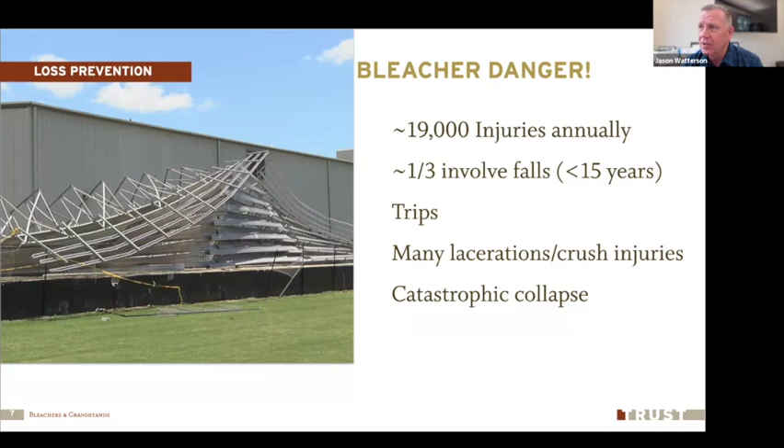One of the major injuries that happen are falls, and falls, as we know, are injuries that can be significant, that can be life-threatening. And then there are those black swan events that are out there when you have a collapse of a scaffold or a grandstand structure, bleachers, that could cause death and serious injuries to a lot of people. And if you look back through history, there have been some really ugly things that have happened at events like this. And you just imagine the mayhem that would happen if we had a collapse, and what would happen if people were injured. It's pretty frightening thing, and so that's why we want to do things right.

Well, I've been using the terms bleachers and grandstands through this, and there's a standard that we go by, and so I went with that standard for the definition. Here is the definition of what bleachers are: tiered seating supported on a dedicated structural system and two or more rows high. Okay, that is a bleacher. Well, when you read in the standard what it says for grandstands, it's the exact same definition. So these two words are really interchangeable.

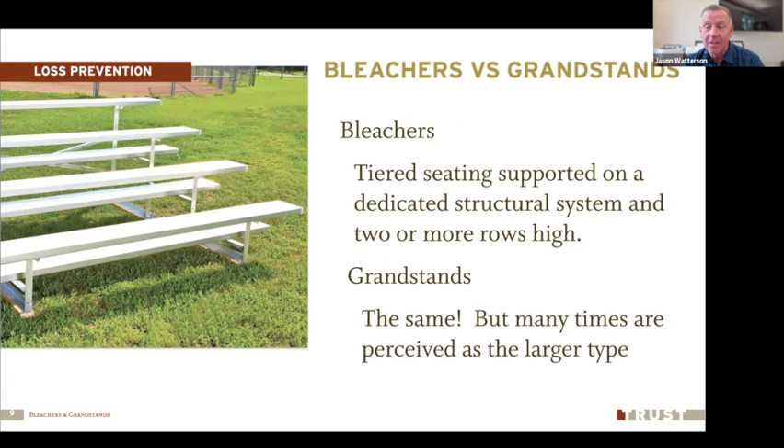But generally, when I think of these things, I think of bleachers as being like in the picture. These are the things that we go out to the baseball diamond or soccer fields. Bleachers are like that, and as they get bigger, we may call those grandstands. But for purposes of this presentation and the standards that we'll talk about, they're the same thing.

All right. These bleachers can either be portable or fixed. Some are designed to be moved from place to place. Some are fixed and they haven't moved in some of our facilities out there. They haven't moved for 100 years. We have some significantly older grandstands and bleachers around. We have some that are brand new, and they all have potential to cause injury. They can be indoor or outdoor. The standards vary a little bit based on that.

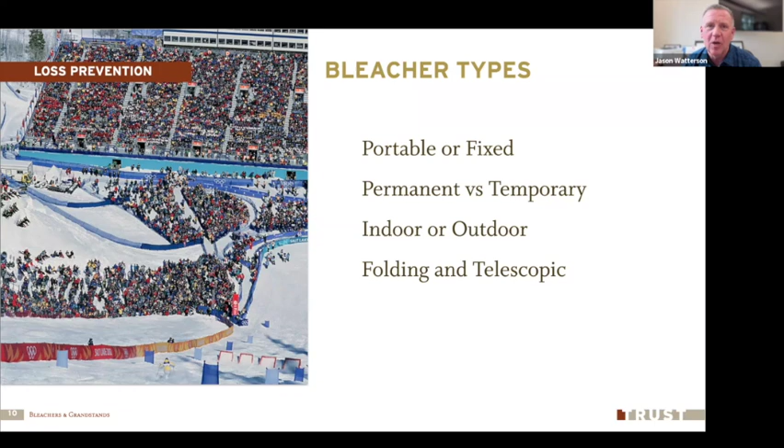They could be folding or telescopic. You think back to your school days, and you may have had telescopic or folding bleachers that would come out from the wall in the gymnasium to provide that seating, but we didn't have to have those up all the time. And there are specific requirements for that as well. In Utah, we have even created some massive temporary grandstands or bleachers for events. I worked for the Salt Lake Organizing Committee for the 2002 Winter Olympic Games, and we created some massive grandstands, particularly for the outdoor venues at our ski resorts. Well, these were temporary.

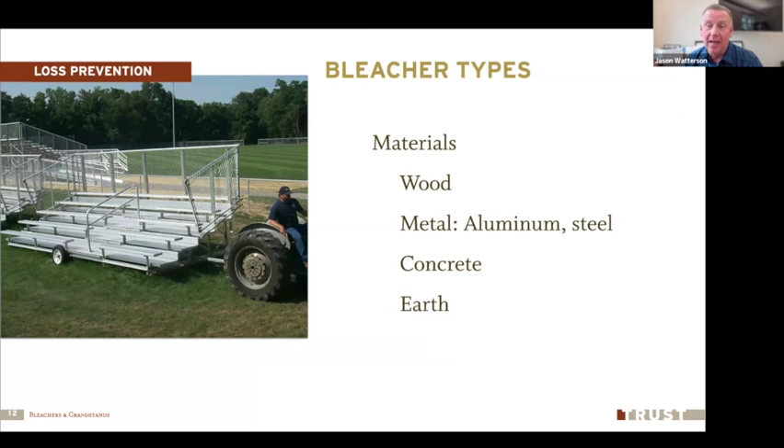Bleachers can be made out of a lot of different materials: wood, metal, aluminum, steel. Sometimes they are poured in place concrete. I've seen some bleachers that are a little more like an amphitheater, but they were just carved out of the side of a mountain, and they all fit into the same definition of bleachers.

I already alluded to this and said it right out. We have standards about how bleachers are supposed to be constructed, how they're supposed to be maintained, and all of the ins and outs around those. Here are the standards that we talk about.

This is the major one that really applies, and that's the ICC, the International Code Council 300, and it's the 2023 standard. So there's a fairly recent update to that. It is an ANSI standard. These are standards that are a consensus among people in the industry. In many cases, consensus standards are not a standard that has legal enforcement power.

But in the event that we have a problem, these will be the standards that we will be judged against in a court of law, in whatever negotiations after a claim has occurred. That ANSI standard or ICC standard could be really critical, so it's important that we know what it is.

With this particular standard, it has been incorporated into the International Building Code. So if you're dealing with bleachers and grandstands, it's part of the building code, and we're going to have to legally comply with this as well.

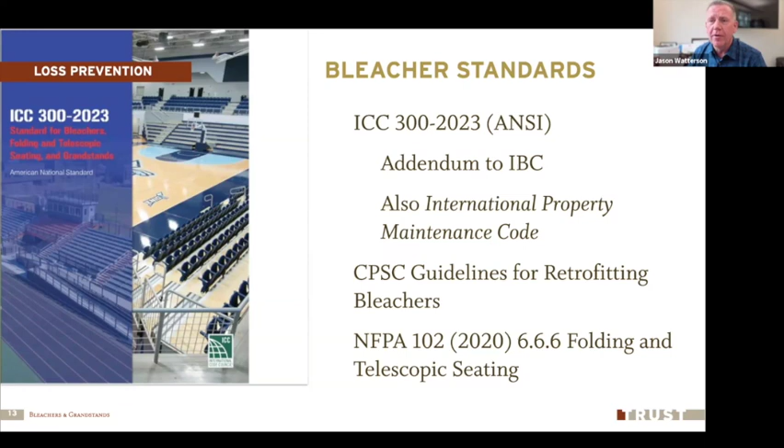We're not going to hit that one specifically much. We're going to talk about the ICC standard mostly. I wanted to hit just a couple of those now because this is really what we're judged against. And if we have an accident, a problem at our bleachers or grandstands, we're going to be dealing with these standards.

So when do the standards apply? For new construction, absolutely these standards apply. In the standard, it has sections on new construction, what the requirements are, and also on things that are existing, on bleachers that are existing and in place. There is also a section on alteration.

If I am modifying an older set of bleachers and doing anything significant besides maybe just replacing a damaged component, a seat board or something like that, if I'm altering those things, the standard applies and I need to bring it up to code. And I'm going to say this a couple times in here.

For many of you, and maybe most of you, you have a code official that may be part of your organization, or you have some interaction with that code official in one way or another. They may work for your organization, or you may borrow them from the county or another organization. They are critical in helping you get your bleachers and grandstands up to code, and they should know this. If they don't, this is something we may want to help them get that information.

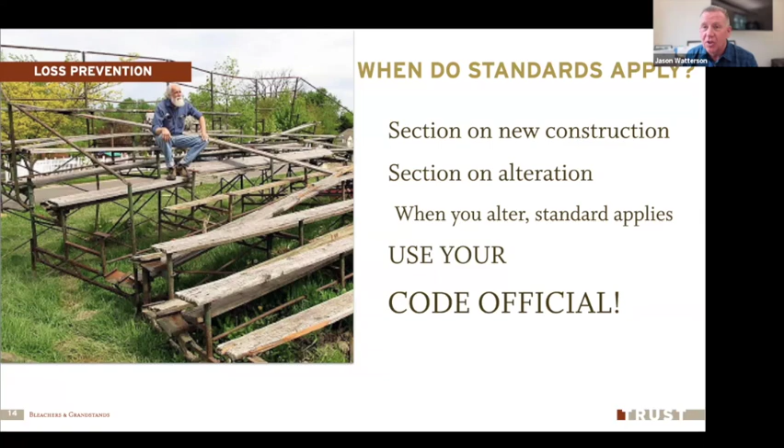I talked about the standard, and I was going to do this when we were talking specifically. This is an ANSI standard. ANSI charges for all of their standards. It is copyright protected material, and I can't just send it out to everybody, otherwise I would be in copyright violation. I can help you if you have questions, and we will share certain sections of the standard here within reason. But this is probably the cheapest ANSI standard I've ever come across—it's $30. You go online, pay your $30, and you can download the standard. Every code official that has this type of structure in their jurisdiction should have a copy of that code.

So what do the standards require? We're going to dive in and talk about some of the major requirements, but we're probably doing more of a 10,000 foot look. There are a few things where we're going to zoom in a little closer, but in general, we're going to give the overall requirement, and then the details should be worked out between you and your code official to ensure we've met all of those. Just because of the differences from one place to another, I can't really address all of those in a webinar in the time we have here.

So what standards apply? Construction—your materials need to be durable, weather resistant. If they're outside in St. George and it's 120 degrees, they need to withstand that. If they're outdoors in Vernal or Cache County and it gets to 40 below zero, they need to withstand the weather conditions there—snow, ice, and freeze-thaw cycles that could cause problems with any equipment that's outdoors. It needs to withstand that. They also need to be corrosion resistant.

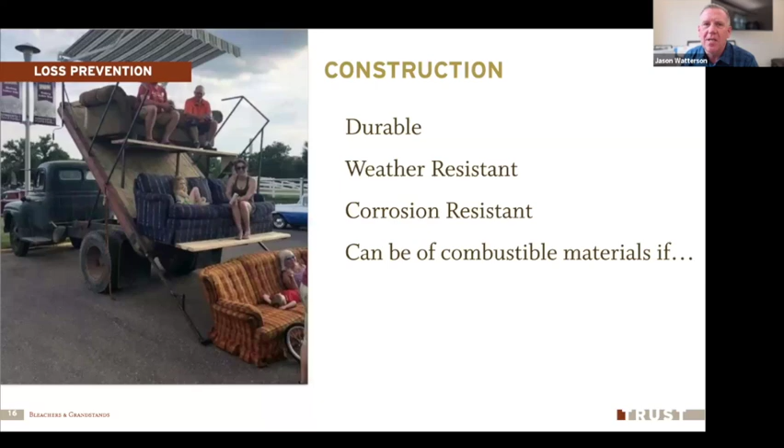If you have a pool, particularly indoor pools, maybe you have a viewing area where people can watch swimming races and things like that take place. Those bleachers need to be corrosion resistant because we know we're going to have excess chlorine in that facility just from the chlorine in the water. These bleachers can be made of combustible materials if they meet the other requirements of the code, so they can be made out of wood.

They need to be on a sturdy foundation. And like I said, each of these different types of bleachers are unique. Some are designed so they can be freestanding. Some are designed to be placed on a solid foundation with footings and foundation, and they need to be anchored to that. However these things are designed, they need to have a solid base.

I've seen some of these—you think about your soccer field bleachers, and they may have two, three, or four different levels of seating. I've seen some that are really poorly designed, without ballast. If you were alone and stepped up to that top tier and sat down, that bleacher is going to tip over. Well, in those cases, we need to provide ballast. Whatever we need to do, we need to meet the manufacturer's requirements, and there should be an owner's manual for each one of these things.

And I know some of you out there right now are rolling your eyes and saying, 'Yeah, our bleachers are 100 years old. It was just folks from the community who went out there, and the local welder welded up the frames, and then a bunch of people from the community went out and bolted some seats on it, and that's what we've got.' Well, in those cases, we've got to maybe bring in some resources to figure out what is appropriate. Can this structure hold the loads we are looking at putting on it? We need to consider the location where we're putting these bleachers.

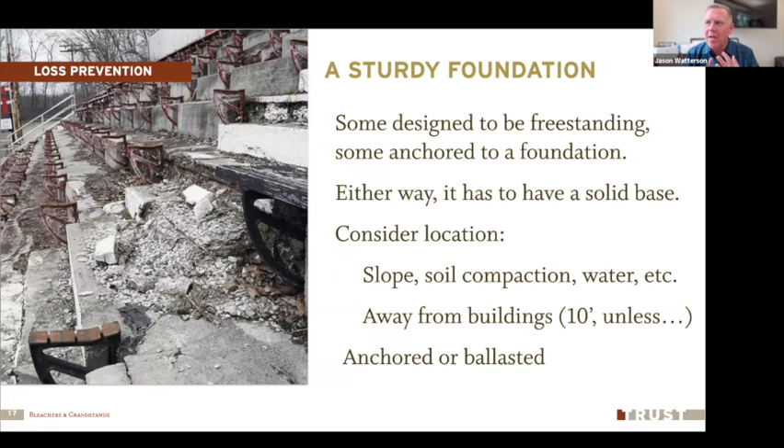Let's move on. What can we do under the bleachers? What is acceptable to put there? Under the code, it says nothing under the bleachers unless it is approved by the fire code official.

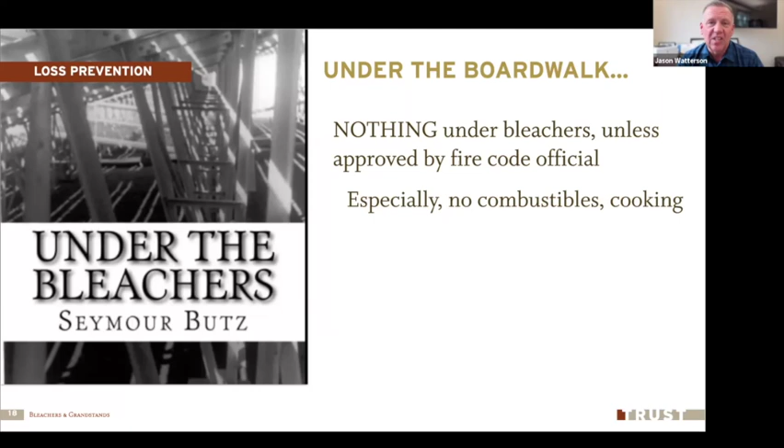Especially, we don't want things like a cook shack or our concession stand under the bleachers, because if something went wrong, maybe a fire in the cook shack, now we've got a fire impacting those bleachers. That's a real problem. So don't be doing anything under there, and in reality we should restrict access to anybody besides our people inspecting and maintaining them, so people can't go under those bleachers.

Occupant load is an important thing. We don't want to put too many people on. This picture we see here was a collapse that happened, I think it was in the 30s, a collapse of bleachers, and you can see people are in the process of just about to be crushed as these bleachers come down.

There's some real potential there when we start putting crowds in our bleachers, and particularly we talk about live loads. There's a difference between a static load and a live load, where people are moving, or that force is a moving force. Everybody starts stomping or jumping up and down because of the event, makes them excited. Well, that live load can be significantly more than just the static load we're dealing with.

So a live load of 100 pounds per square foot is the basic requirement there. For press boxes, it's 50 pounds per square foot. And then there are some other guidelines we look at.

One person per 18 inches of length of bench. So for every 18 inches, that's one bottom that can sit there.

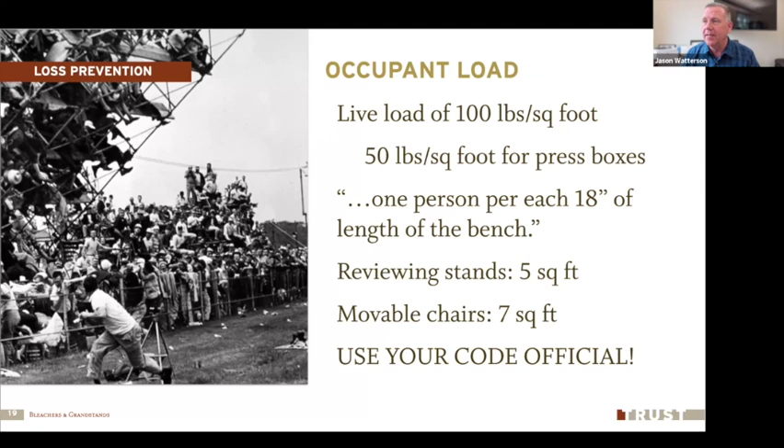I'll just say, Mike, if we have any questions, feel free to jump in anytime. I know we may have some as we go through today. Okay, so far, Jason, good job. All right.

This is a chart here where we talk about the load capacities that are required. This comes out of the standard. This is important, it talks about our handrails and guards, how much weight they need to be able to support, as well as the direction that weight needs to be able to support.

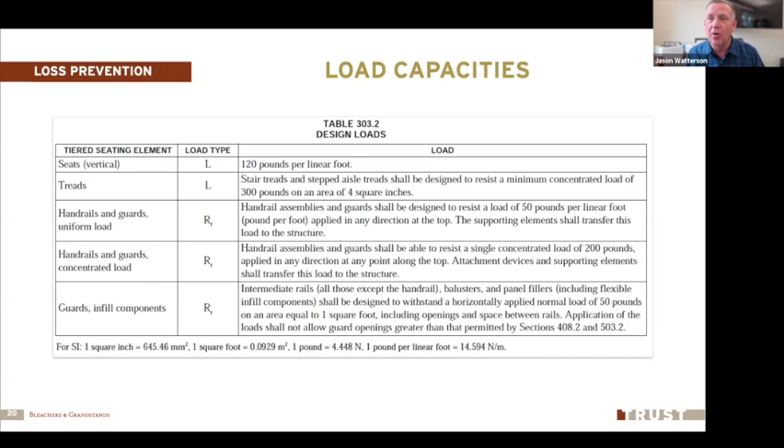So egress obviously is an important consideration when it comes to bleachers, and particularly grandstands. What happens if we have some emergency happen? It could be something like a fire, it could be a disturbance.

Somebody gets out of control, and people got to get out of there quickly. It could even be a hailstorm or a weather event, something like that. People got to be able to get out of there. Well, how can they safely egress that?

Once again, follow the code, and a lot of this mirrors the building code. It's based on the occupancy. How wide do our egress paths need to be? Well, it's based on the occupancy, but the minimum is 36 inches. Talk with your code official about this.

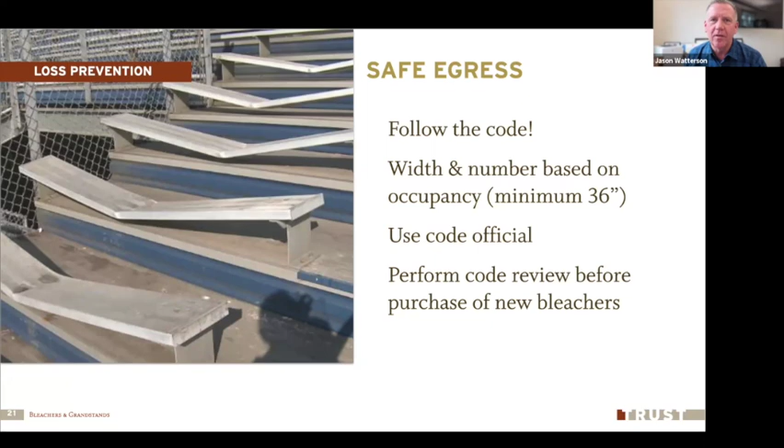I would say perform a code review before you purchase any new bleachers. What are we going to be required to do? Are we going to have to put fire protection on these bleachers? There are situations where we may have to do that. Prior to purchasing these, sit down with your code official and go through the standard and say, when we purchase this, what do we have to meet? What do we have to do?

Here's another chart, minimum number of exits. So up to 250 people, there's one required means of egress, but when we throw in the ADA, it basically means we need to have two accessible routes of egress. So once I get up to requiring two, they need to be accessible. That means they need to meet the ADA standards as far as slope for ramps, and width requirements, landings, all of the things that go along with the ADA are applicable.

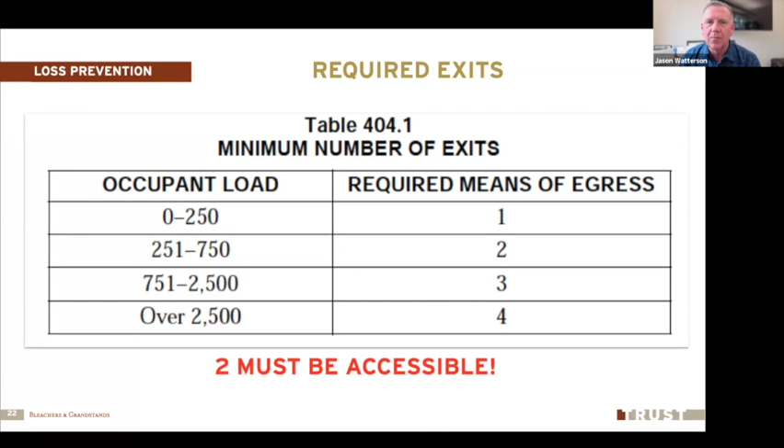I'm not going to give you all of the minute detail on that because that's really something we need to work out with our code official. Here's the ADA standard. It requires newly constructed facilities to be accessible to people with disabilities so they, their families, and friends can enjoy equal access to entertainment, recreation, and leisure. Older facilities have to be brought into compliance when they are significantly altered. Same thing that we do with our buildings.

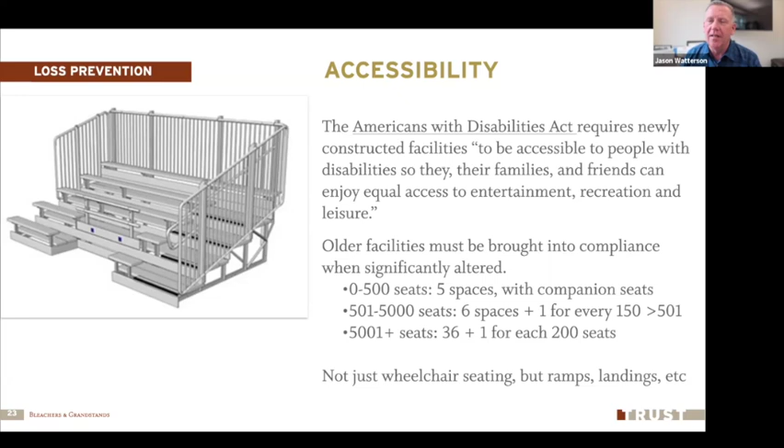But if we look here, how many accessible seats or wheelchair accessible seats do I need? Well, up to 500 seats, I got to have five, along with companion seats for family members or companions that go along with the person that is seated in the wheelchair. And then we go up based on the number of people, the occupancy potential that's there. And just remember, it's not just that we have wheelchair seating, but everything else that goes along with it. Is there an accessible route to get them there?

Now, here's where we look at many of our grandstands around the state and bleachers are not compliant. We have some issues with these based on spaces that could allow somebody to slip and fall. And maybe they just drop a leg down and they get a laceration off of that piece of metal that's there, or maybe they fall right through.

Years ago, we brought on a new member of the trust and went out to do an inspection and audit of their facilities to give them a risk assessment and say, here's some things that you need to work on. Well, we walked out on a grandstand, and this was a big grandstand. It probably held, I would expect 2,000 or 3,000 people. It was about 30 feet high at its uppermost tiers.

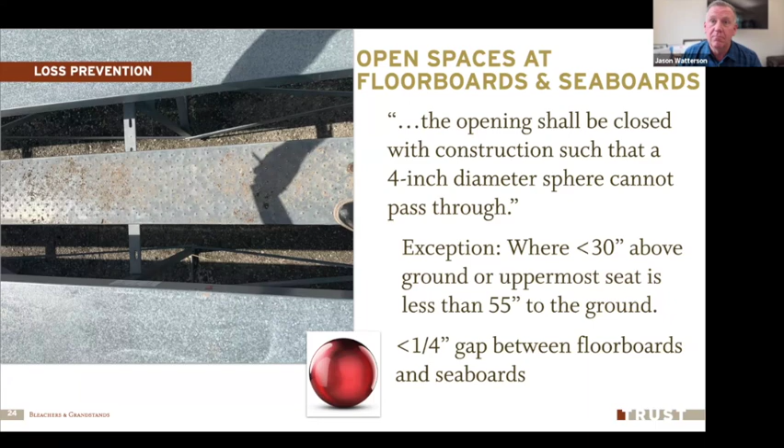There should be less than a quarter-inch gap between the floorboards and the seat boards. So really, children shouldn't be able to get their fingers into gaps or openings there. This is probably one of the major impacts of this whole standard and the presentation we're doing today, involving the spaces under, over, and around the area.

I was going to talk about if you went back to that Olympic grandstand that we saw up at the Utah Olympic Park by the ski jumps. We had that grandstand, the ground fell away behind, and so you could fall over 100 feet, and I would dare say it was close to 200 feet when you put all of the slope into it.

I got a call one day from Fraser Bullock, the big boss, right? Mitt was involved, but Fraser did everything, right? He was the guy that really made things happen, the chief operational officer. And I get a call from Fraser, and he says, 'Are you the guy that sent out this letter?' I said, 'Yeah.' And the letter I had sent out said, 'We've got some serious risk issues with the grandstands, and we need to fix those before we're able to put people in these things.' And he says, 'Where are you?'

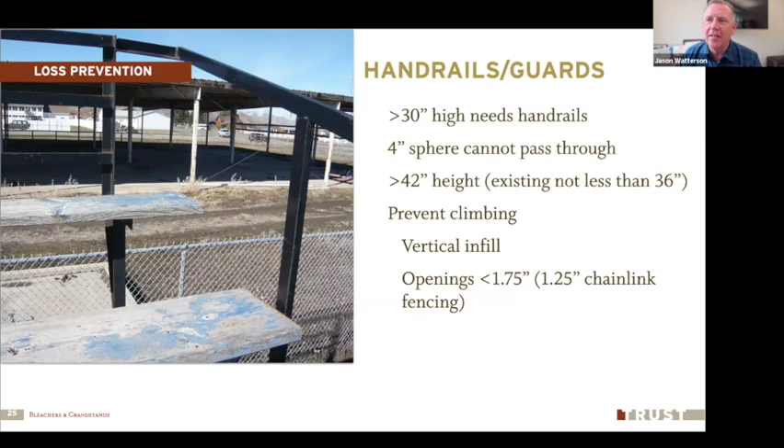Can I use chain link? The answer is yes. So openings should be less than 1.75, 1 3/4 inches for vertical infill. If it's chain link, it needs to be 1 1/4 inches or smaller. We don't want to be able to get a toe into that chain link. I know some people are accomplished chain link climbers out there, but in general, most people are not going to be able to get a toe hold to climb up. Chain link's not the most beautiful stuff, but it works to meet this requirement.

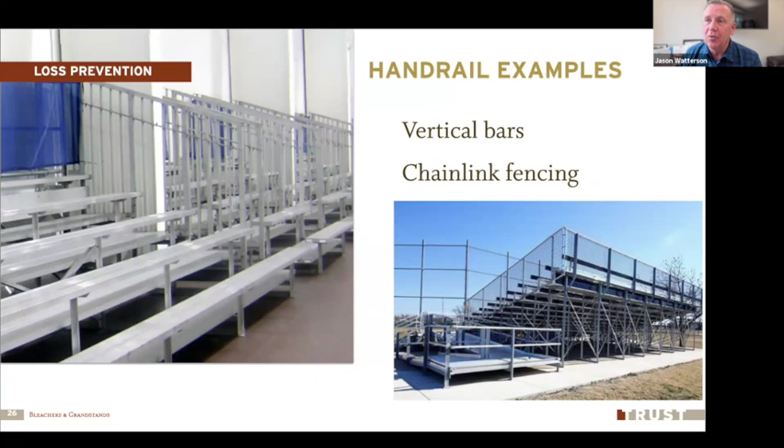Sometimes if we're doing retrofitting, chain link may be the appropriate material to put barriers on these sides, put guards there.

Fire protection. I'm not going to go into detail on this at all because it doesn't apply to the majority of our bleachers and grandstands out there. If we are accommodating more than 15,000 people, then it is a requirement. Once again, talk to your fire official on this. I would look more at indoor spaces where we have these grandstands, which would certainly fall into this more so than outdoor spaces.

But you are required to have a public address system if you have - oh, I lost the number, I believe it's greater than 300, I could be wrong on that - we have to have a public address system, and that's to accommodate people making an exit from the facility.

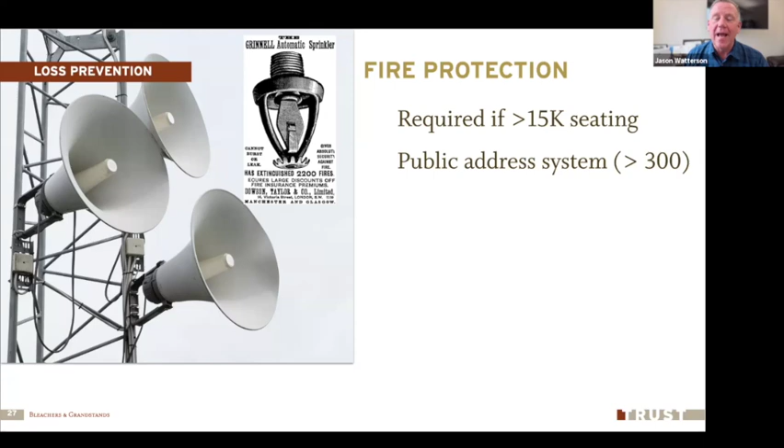Head clearance is another thing to be concerned about. In general, you've got to have at least 80 inches of head clearance. I remember some bleachers as I was growing up in schools that would go right up into the rafters and you could hit your head on the ceiling there. Well, that would be inappropriate under the standard. If you're inside, then that clearance goes to 15 feet. There are some specifics about the types of spaces inside. Once again, talk to your fire official about that.

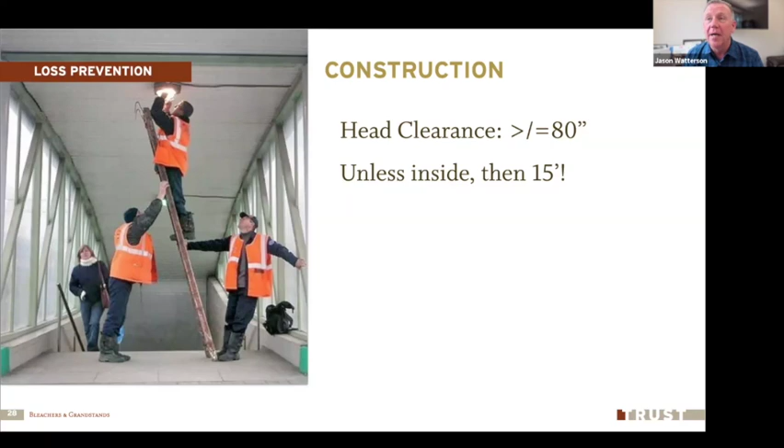Don't forget the manufacturer's guidance. You should have an owner's manual for that. You should have documentation from the purchase of those grandstands. If you don't, you should go out and find those. If the company is still in existence, they will send you an owner's manual. They will give you all the documentation because they don't want to get sued either. They want you to have all the information you need to maintain your bleachers in a safe condition because they don't want to get sued either. So make sure you have that.

Maintain a file on each of those structures that you have out there. If they're old ones, we may have to get some engineering documents to really show us what we're looking at and that it's appropriate and meets the standard requirement.

Inspections. This is probably one of the major tenets or major to-do items in this standard. What is that? It says, and I'm quoting here, bleachers shall be inspected and evaluated at least once a year by a qualified person for compliance with the provisions of the standard. Wow. We need to document annual inspections of our bleachers and grandstands.

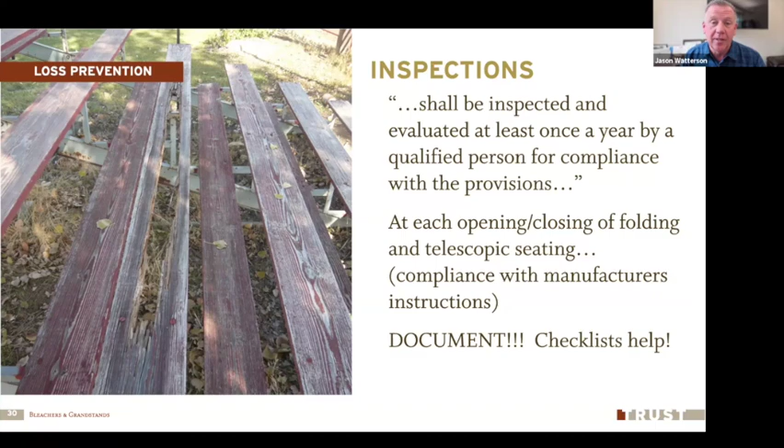So who's a qualified person? The definition in the standard is a professional trained in the proper and safe use, operation, and repair of bleachers, and is knowledgeable in the requirements of this standard. So somebody, probably within your organization, needs to be trained up on this standard.

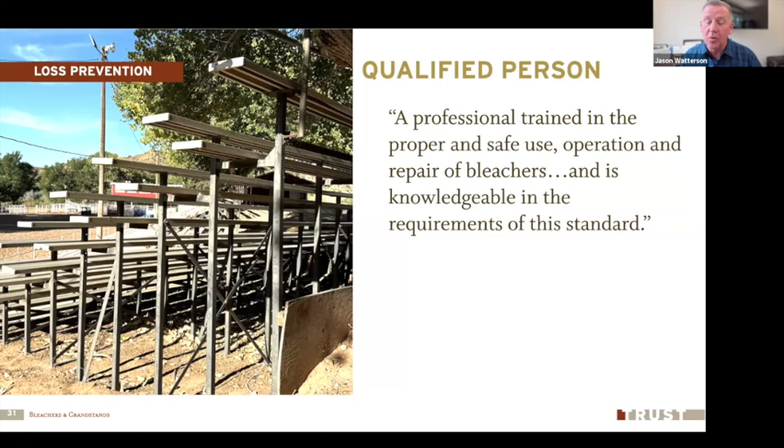Now, does this webinar make you a qualified person? I would say probably not. It gets you partway there, but it doesn't talk about the specifics of your bleacher system, your grandstands. There's going to be something with the manufacturer that your qualified person needs to be trained up on. I'm happy to walk you through things, but that manufacturer is really key in all of this. All right, here's some things to watch for.

Slip and trip hazards are common things you can see in this picture. Here's an old grandstand structure, and it's quite nice even though it's older, except they haven't done a very good job of keeping their bolts tight. These bolts are terrible trip hazards. It would be really easy to catch your toe on that if you're walking on the seats, or it could be a laceration hazard if you sit on it or walk into it. Let's look for those things.

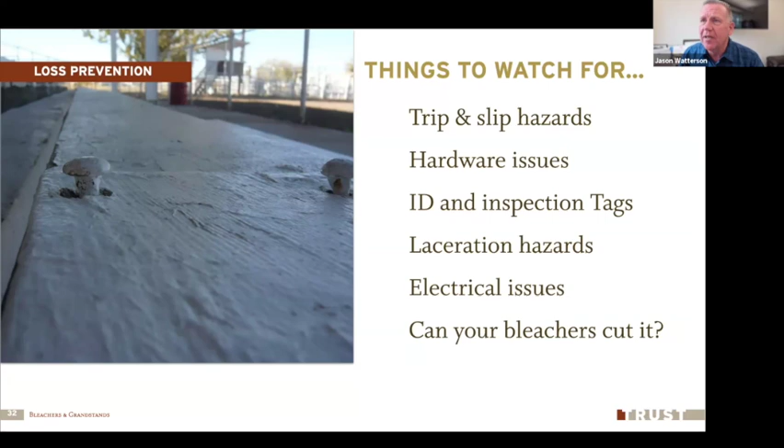Look for hardware issues: if things are broken, if bolts are not tight, if we're not sitting level and flat on our base structures, all of those things. If our ballast isn't in place -- and we'll talk about these other things in the upcoming slides.

In the standard, it says an identification and inspection tag shall be installed in a visible location. I've got pictures of bleacher seats here because in all the years I've done this, I've never found an inspection tag. That makes me nervous because it's in the standard. Newer systems will have those in place, and that's probably the reason I may not have been on something that is brand new. But a lot of our older things won't have them, and we may have to come up with that or contact the manufacturer and get one.

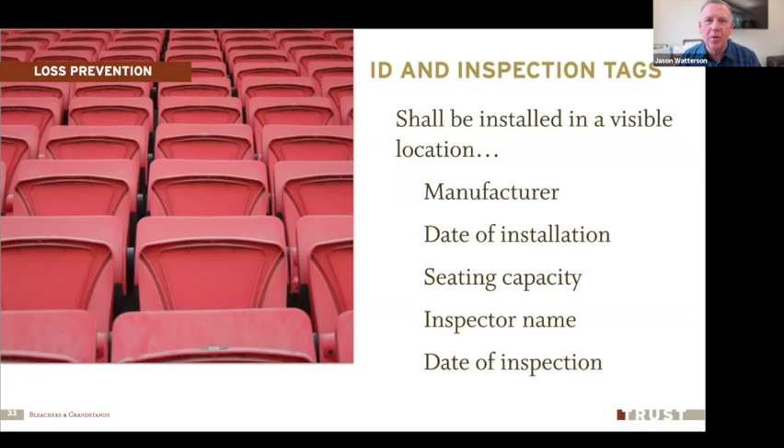So it should say who the manufacturer is, when these were installed, what the total seating capacity is, who the inspector was when they put it in place, and the date that happened. That's a pretty key thing to have in place. If you go out and do your inspection on your bleachers, please let me know if you find these things -- I'd like to hear what the overall experience is.

We need to inspect for damage, and that means we need to walk all of the bleachers. I can't sit on the other side of the rodeo arena and say everything looks good over there. I've got to walk at least every other row to see where that damage may be.

When you get out there, shake it, jump on it -- don't jump on it too hard, we don't want you to go through. But let's look at these things under use and ensure that they're in good condition.

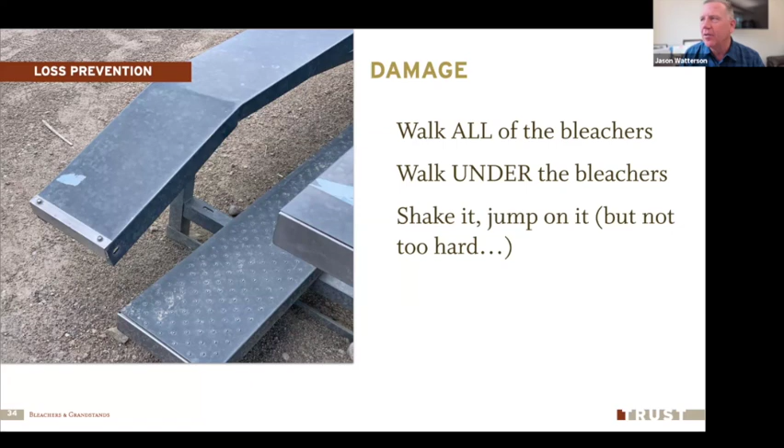Look for laceration hazards. Do you see a laceration hazard in this picture? I actually see a couple. The one I see is right in the foreground -- you can see those two bolt heads, and then a gap in between those seats.

Well, that edge along there was really sharp, and we had somebody stepping on that, and they slipped and really lacerated their leg on that sharp area. It ended up being a rough, difficult claim. It's a laceration hazard, and it may not be really apparent. We look at that and think, maybe that's just how it's put together. No, it really wasn't. Those needed to be installed tight, so there was not a gap.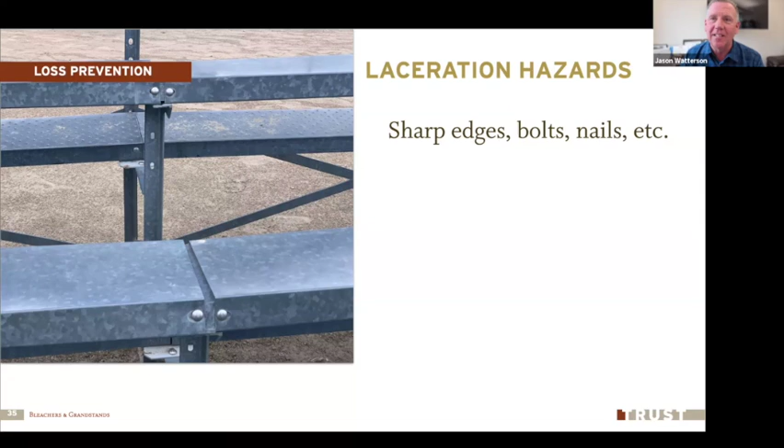Look for sharp edges, bolts protruding, nails, anything like that, depending on its construction. Look for electrical issues as well. Talk to your code official on that.

So no electrical should be on bleachers and grandstands unless it's designed to have it that way. We also want to look at our commentator stands, press boxes, and places like that to ensure we have safe electrical systems there. If electrical is outdoor, it needs to be ground fault circuit interrupter equipped.

All right, apologize guys, I've gone a little bit long here. The last slide, well, the second to last slide. Can your bleachers cut it? Are they adequate for the type of loads, the people that we're putting on these bleachers? Can they handle the activities that we're putting in there, the events?

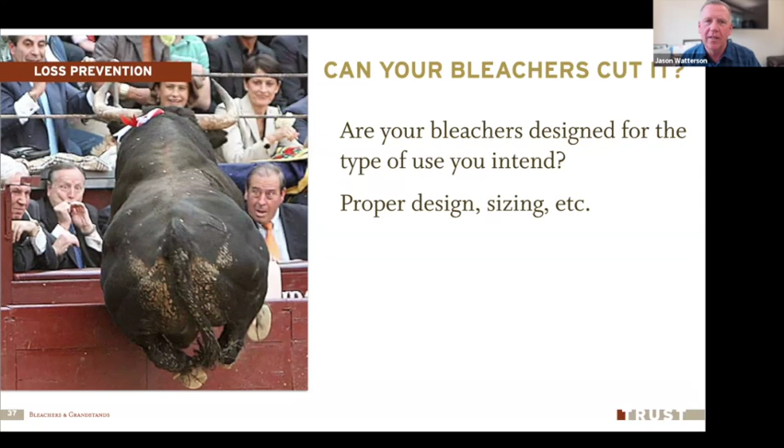All right, we've covered a lot of stuff, and I apologize, I went a little longer than anticipated, but there's just a lot here. Just a few reminders: make sure you know your standards. Talk to your code official about these things. Buy the right structures. Don't just go out and buy whatever. Really do a review on this. Let's look at the codes. Let's look at how we're going to use it. Let's look at the weather it's going to be exposed to, and let's put the right structure in place, and let's maintain it appropriately. Inspect it every year, document those inspections, and then live long and prosper.